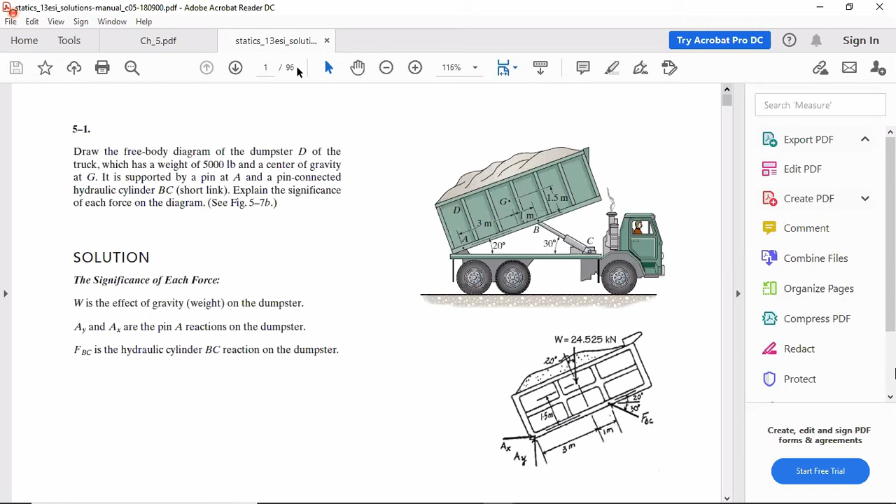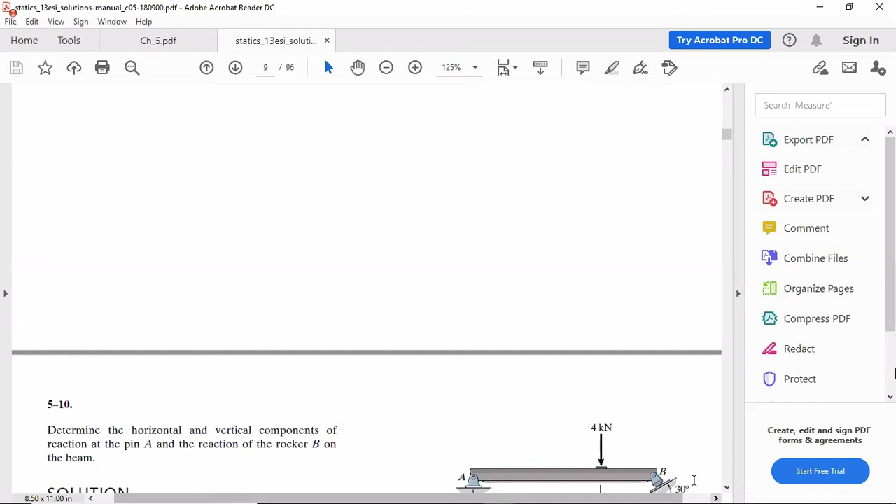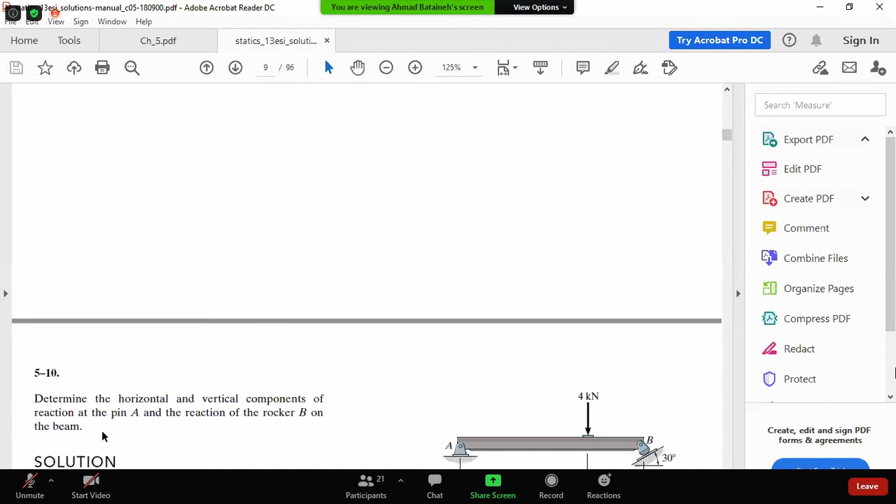Determine the horizontal and vertical components of reaction at pin A and the reaction of the rocker B on the beam. عندك هون rocker وعندك هون pin connection، وبدنا نحدد ال horizontal vertical component على الرياكشنز الموجودين A و B.

مين بيحب يبلش؟ دينا، يلا يا دينا.

دكتور، أول إشي نبدأ بالنقطة A، بدنا نعمل الفري بودي دايجرام. عند النقطة A، بما إنه عنا... هاي بن مش رولر، بن. أوكي بن، تنتين، عندي تو فورسز، واحدة بالإكس واحدة بالواي: A واي و A إكس.

تمام، حلو. النقطة B روكر. أوكي، رح يكون عنا قوة واحدة عمودية على البي، ورح نعملها تحليل. دكتور ليش عمودية؟ مش مايلة بزاوية 30؟ عمودية على النقطة B أنا حكيت، مش عمودية على البيم، سوري.

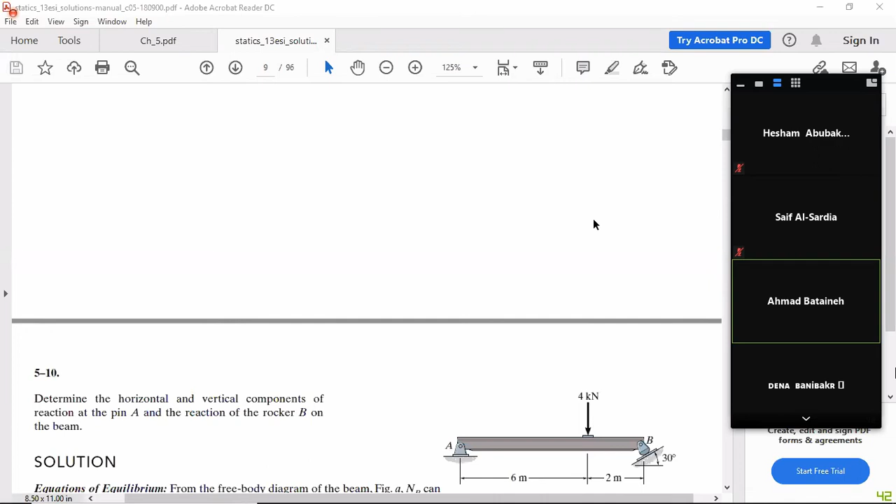رح يكون عنا summation F X equal 0. فهي عنا على الاكس ax وعندنا الكومبوننت تبعت البي بالاكس دايركشن، اللي هي رح تكون عنا N B sin 30. كم هي N B قيمتها؟ ولا مش معنا؟ لسه مش معنا.

طيب يعني رح تضل معادلة بمجهولين هاي. حلو ماشي. السميشن ل F الواي equal 0: في عنا A Y زائد N B cosine 30 ناقص 4 equal 0. برضو هاي معادلة بمجهولين.

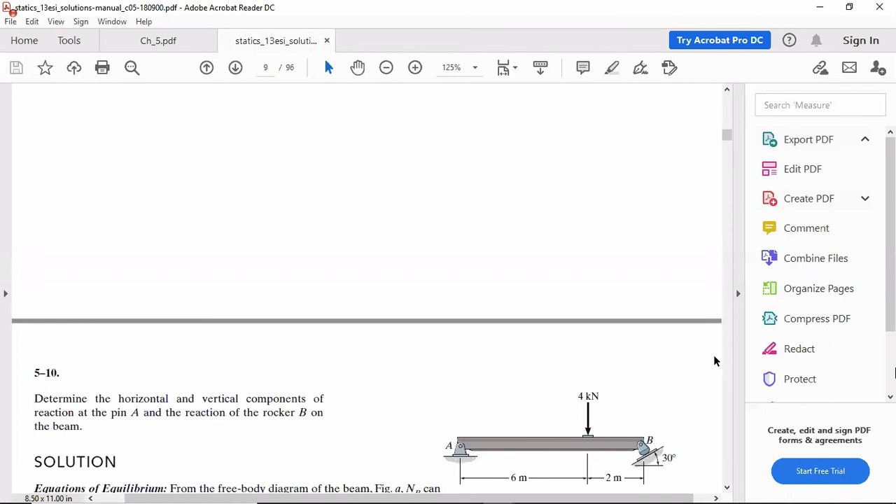تمام، طيب معادلات المومنت. مومنت ناخده about A. ماشي، في عنا أول إشي N B cosine 30 ضرب 8، ناقص 4 في 6. ال N B cosine 30 عملت لك بوزيتيف مومنت، والأربعة في 6 عملت سالب نيجاتيف، 4 رح تكون مضروبة في 6. مظبوط equal 0.

منها رح نطلع ال N B. اللي عملته دينا كالتالي: أول إشي عملت الفري بودي دياجرام AX و AY، عندها ال N B اللي طلعت 30 مع الفيرتيكال.

فحللتها ل N B cosine 30 على الفيرتيكال و N B sin 30 اللي هي along البيم. summation of moment about ال A equal to 0. هدول الفورسز مش عم يعملوا moment، وال N B sin 30 برضه مش عم تعمل moment passing through A. ضل عندي ال N B cosine 30 في المسافة اللي هي 8 حتعمل لي بوزيتيف اللي هي كاونتر كلوك وايز، وال4 كيلو نيوتن تايم 6 هتعمل لي كلوك وايز سوري اللي هي نيجاتيف. طلعوا من خلالها ال N B.

بعدين سميشن فورسز بالاكس equal to 0: N B sin 30 minus AX أو العكس AX minus N B sin 30 equal to 0. طلعنا قديش قيمة AX. summation forces بالY equal to 0: AY plus N B cosine 30 minus 4 كيلو نيوتن equal to 0. قديش طلعنا قديش قيمة AY.

تسلموا لي كثير. دينا زياد صح؟ دينا زياد بن بكر ولا مش بن بكر؟ اوكي، الكويز الاول مش كان مظبطه فيك عندك. ما حكيت لك راح علي اصلا. والله، اه طب هاي بلس 2 يا زيد يا دينا على الكويز الاول. شكرا دكتور.

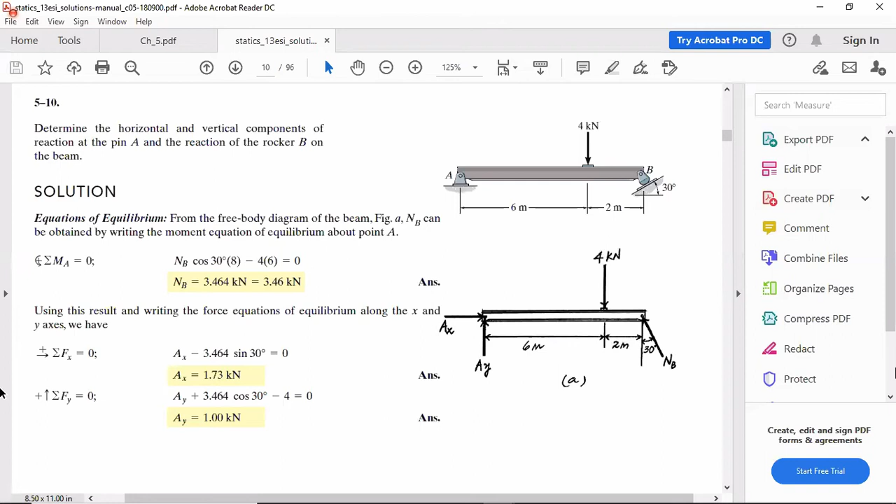هسه بتشجع وهسه بصير تهاوش مين بحل السؤال. مين بيحب يحل هذا السؤال؟ يلا بدون علامات بس. طب مع علامات، it's technically the same question.

It's the same thing like above, but with another force. Determine the magnitude of the reactions on the beam at A and B. أعطيك هون pin connection وهون rocker at B.

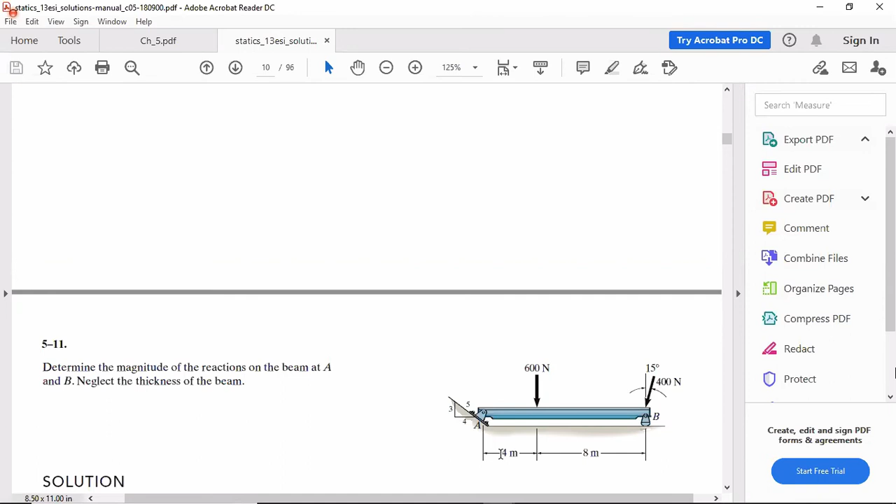So we have a force at A and force at B. So they want it at B, so everything at A is negligible because we want it at point A, right? Because you wanna do the summation moment about A first?

Yes. Okay, so we have 600 newtons downward. Then we have 400 cosine 15 going down, and 400 sine 15 on the horizontal axis.

Okay, what about the reaction at B? And the reaction at B, we have it going up as well, right? Okay, so you have By in this direction. So yeah, first let's do the free body diagram. Okay, you have this 400 Newton with an angle 15, and you have this 600 Newton. What about reactions at A and B?

At A, we want to neglect A if we're taking it at point A first. Just free body diagram first, don't apply equations of equilibrium. Okay, we have one at A and B.

You have at A, a pin connection, so you have two forces, X and Y. But at B, it's only in the Y direction, while A has both X and Y.

So then you're going to apply equations of equilibrium. You're going to apply first, summation moment about A equal to 0. So you have 600 Newton, the 400, and By, and they all equal 0. Apply equations of equilibrium, apply summation of moment.

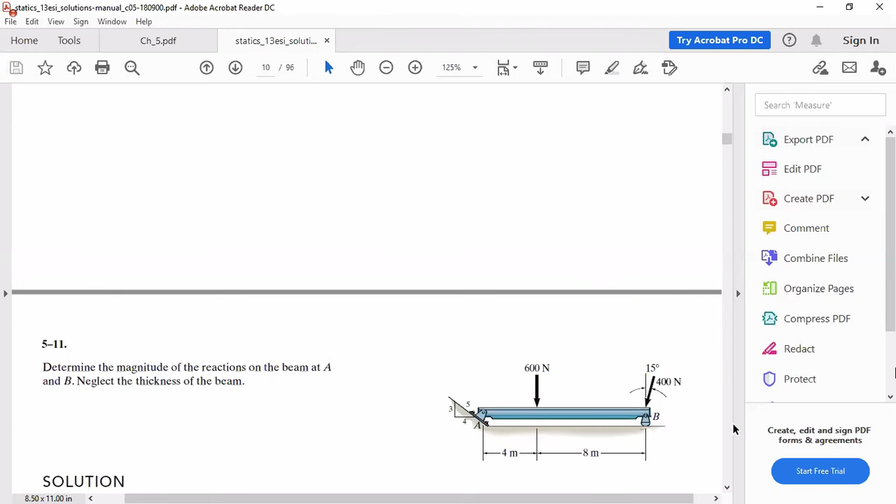Okay, so what he did is like this. This is By, but he assumed it downward. So it's the same setup: Ax and Ay, 600 Newton, 400 Newton cosine 15. Applied moment about A equal to 0, we get the value of By. If we apply the equations we will get negative 586, that's why he's going to reverse the direction that he assumed.

Summation of forces in the x direction equal to 0: we have Ax minus 400 sine of 15, the x component for this force, and we find Ax. Then summation of forces in the y direction equal to 0: we have By that we already got, we have 400 cosine 15 down, minus 600 Newton down, and we have positive Ay, and we get the Ay component.

If we need the magnitude of the force at A, the y component squared plus the x component squared under the square root, we'll get the resultant force at A. And then we do the same thing at A for point B.

It's the same: once you apply the summation of moment at this point, you get the unknown force, which is By. Then you apply summation of forces in x and summation of forces in y, you get the other unknowns. If you have to, you might do another summation of moment about another point, instead of this one, you can do summation of moment about B equal to 0.

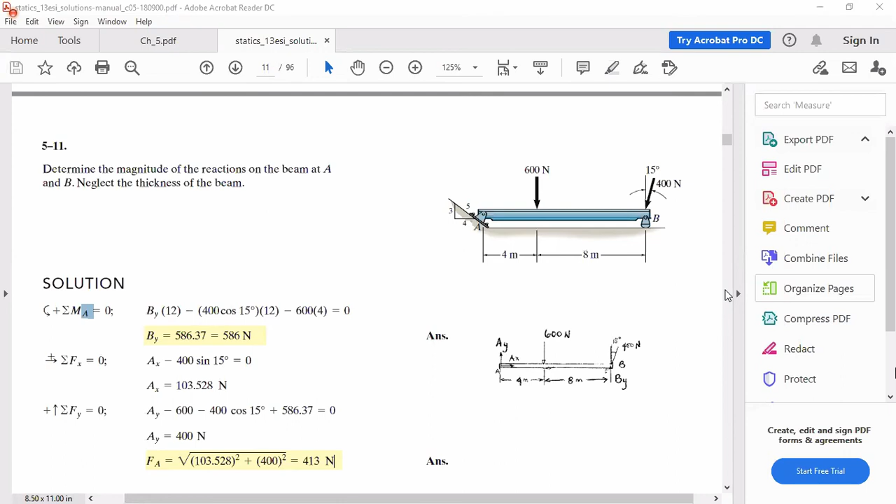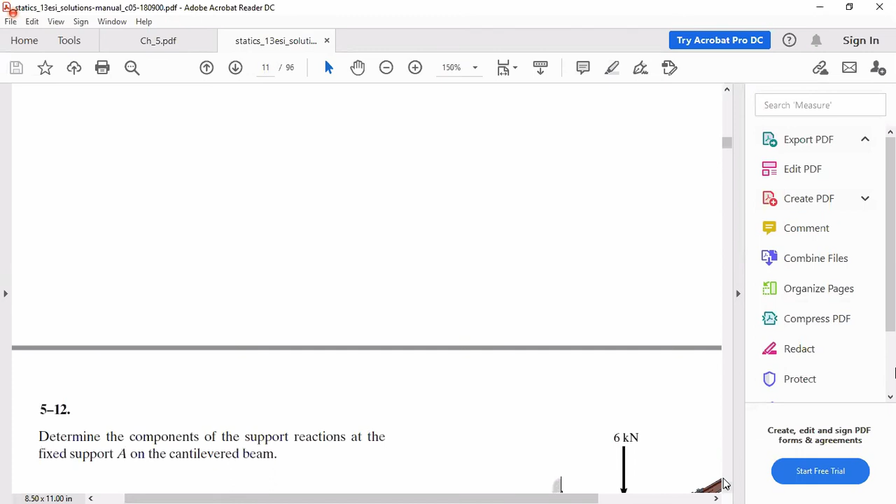Determine the components of the support reactions at the fixed support on the cantilever.

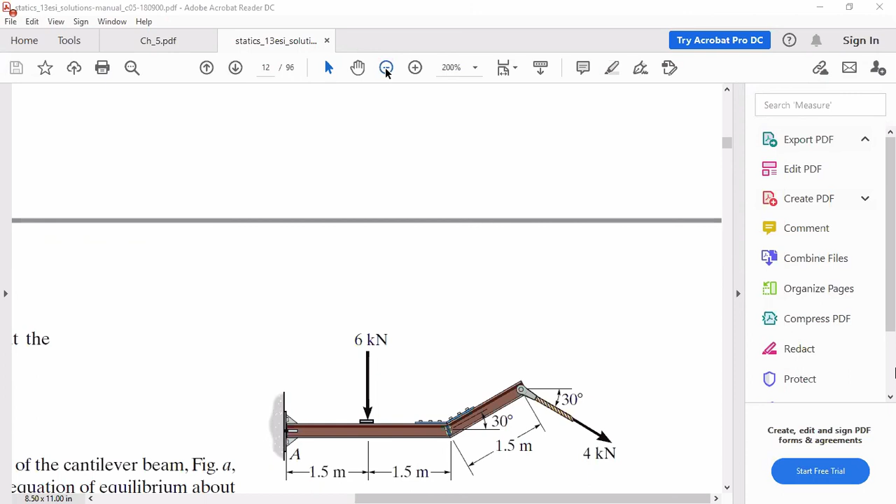The moment already assumed counterclockwise minus 6 times 1.5 minus 4 sine 30 cosine 30.